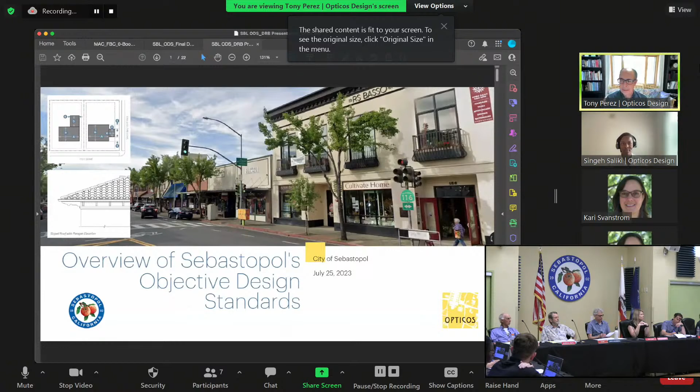Thank you, Tony. Can you guys hear me okay? Yes. Okay, let me go to my presentation and share my screen. Singeh, if it would help, I have the slides and can share my screen. Yes, please do. Okay. Is that coming across? Yes. Okay, thank you. You're welcome. Okay, hello everyone.

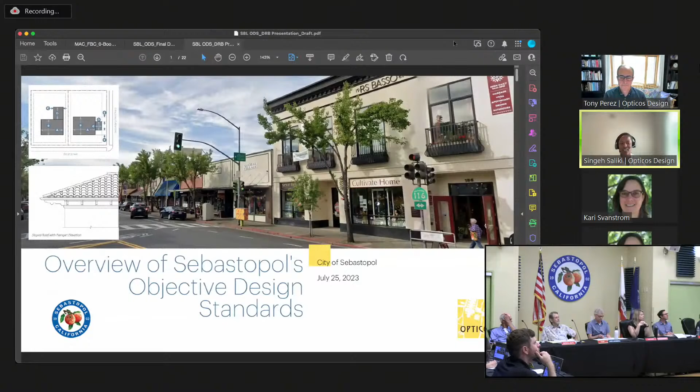As Tony said, today I'll be presenting an overview of Sebastopol's objective design standards. Next slide. The topics I'm going to cover are: what are objective design standards, where the standards apply, how we prepared the standards, and an overview of the specific topics covered by the standards.

Next slide. The California Government Code defines objective standards as standards that involve no personal or subjective judgment from a public official. The reason the state is requiring objective standards is to support more streamlined review and approval of housing projects. Next slide.

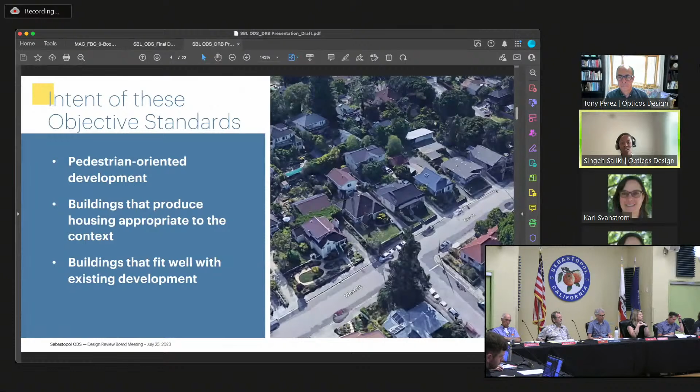The intent of these standards is to really look at the form of development in Sebastopol, to understand how these standards could reflect development oriented to pedestrians in both form and scale. The standards focus on producing housing types appropriate to the different contexts in the city. For example, housing types appropriate for downtown might not be the same as those appropriate for Healdsburg Avenue or South Main Street. The standards also try to produce buildings that fit in with existing development, reflected in the form, character, and scale of what will be produced by the standards themselves.

Next slide. The standards will apply citywide to all commercial and residential parcels that currently allow 2 or more units. This includes areas where duplexes are allowed, as well as multifamily zone districts and mixed-use zone districts where residential is an allowed use.

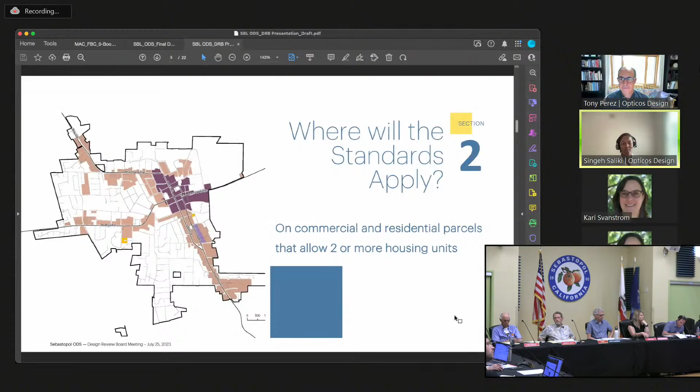Next slide. Our approach to developing this is form-based, where we use the existing and intended physical character as the inputs to develop the actual standards found in the final document.

First, we looked at the existing character in the neighborhoods throughout the city and identified prevalent patterns that we found. We also looked at the existing development standards and what they actually produce, to understand the intended physical character.

Specifically, we looked at the zoning envelope allowed for each of the zones where the ODS would apply, so that's R5 through R7 and the CO, CG, and CD zones. We compared the prevalent patterns to the intended physical character to see if they are in alignment, and also to help inform the new ODS standards.

Our research was summarized in an existing conditions memo that we produced earlier on in the project.

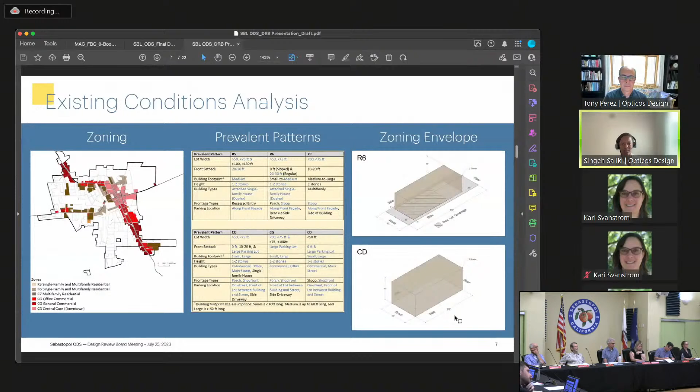One key concept we focus on is differentiating between house scale and block scale. The downtown area is a block scale environment characterized by buildings with zero front and side yard setbacks, and the buildings really help to define the street. This is in contrast to the adjacent neighborhoods, which are more of a house scale environment with increased front and side yard setbacks. The reason this is important is because we want to ensure the ODS fits across a spectrum of environments that will allow both house scale and block scale projects to occur.

I just want to say to everyone that if you notice, this is downtown Healdsburg, and we're not talking about downtown Healdsburg in any of these standards. But we found that in presenting this concept of house scale and block scale buildings, this little snapshot of downtown Healdsburg is a really clean, simple way to explain it. We're happy to make a diagram like this for Sebastopol.

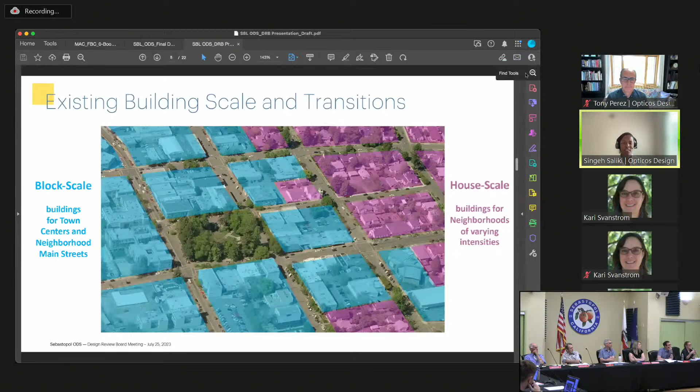Our analysis resulted in the ODS being organized into a palette of 4 districts, intended to produce a spectrum of intensity from lower intensity house scale neighborhood environments, shown towards the left side of the slide, up to higher intensity block scale environments, shown towards the right side of the slide. You can see some of the key metrics for the 4 different districts, the number of stories allowed and the overall height allowed in each of these districts.

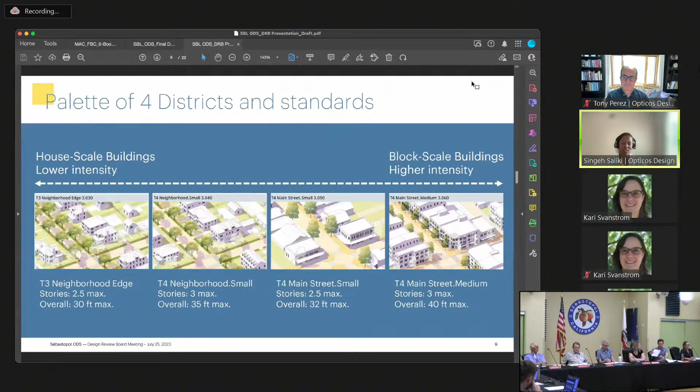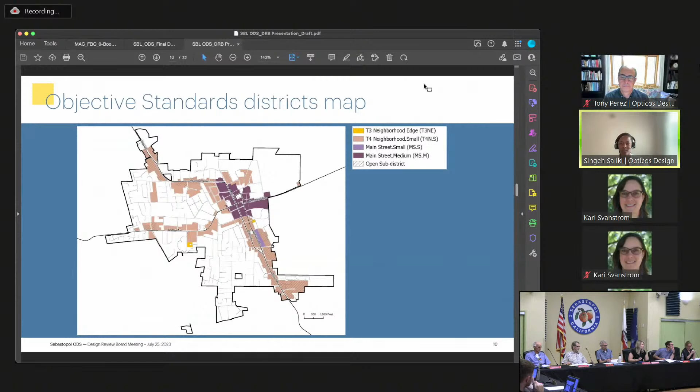Now I'm just going to give an overview of the specific standards that will be in what is called Article 2, which will be a new standalone document adopted by resolution. The document is organized into 11 chapters, and I'm going to go through and describe some of the key features, as well as dive in more into specific chapters to provide more detail.

Starting with the preamble, it describes the context and the Sebastopol transect and identifies the form-based districts that implement the Sebastopol transect. Chapter 1 is just an introduction that specifies the basis and intent for the ODS. Chapter 2 establishes the palette of the 4 districts included in the ODS. Chapter 3 provides specific standards that apply to each of the districts. Chapter 4 provides standards that guide the design of sites.

Chapter 5 goes into detailed standards to shape the zoning envelope through the use of specific building types. Chapter 6 is for standards for frontages, which is the transition area between the back of the sidewalk and the building facade. Chapter 7 is for architectural design standards and is style neutral. Chapter 8 provides standards for signage, and chapter 9 standards for large sites, which apply in situations where you have a very large parcel -- the threshold in this ODS is a parcel that's at least 3 acres, where there's an expectation to subdivide it into new streets and blocks.

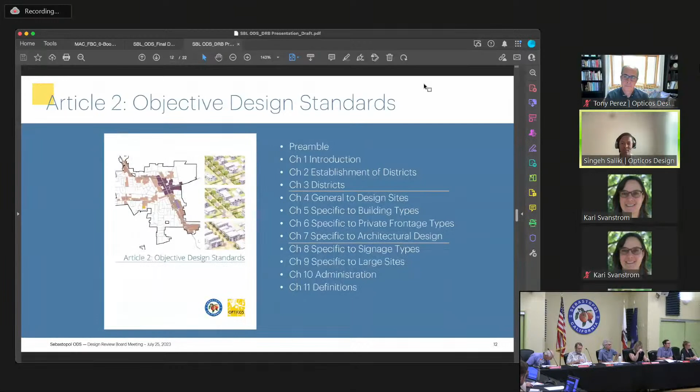I'm going to go into detail now about the specific contents of different chapters, starting with chapter 3. As I previously mentioned, chapter 3 contains guidance for the basic zoning envelope for each of the four districts in the ODS. It's organized in four pages and includes the intent of the district and the basic dimensional standards that help create the zoning envelope. The standards are presented in tables, and they are keyed to the diagrams above the table.

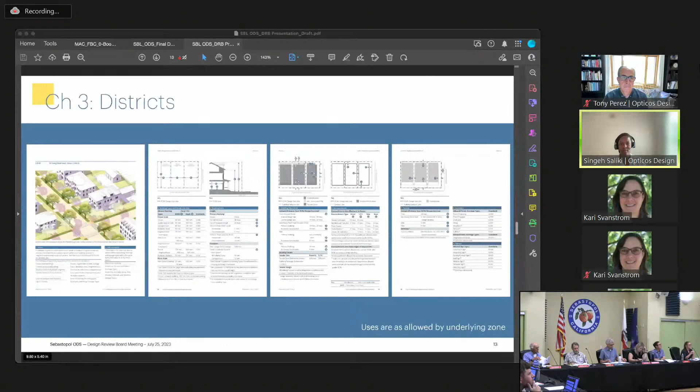Chapter 5 goes into standards for specific building types, which is really a way to think about the outcome of the zoning envelope. It ensures that the ODS produces buildings which are compatible in form and scale with the surrounding context. The building types are organized by zone, by district, and range from house scale types, like duplexes and triplexes, to block scale building types such as Main Street buildings and larger courtyard buildings. The standards regulate the building footprint and also provide guidance for how the footprint can be expanded using wings.

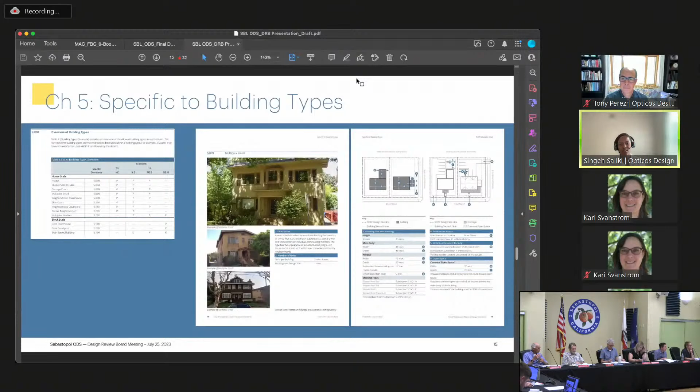Chapter 6 addresses frontages and provides specific guidance for this area, which is a transition between the back of the sidewalk and the building facade. The standards are organized in a spectrum to ensure a consistent public realm, because this impacts the pedestrian experience as you move along it. The frontage types are organized by districts and range from more residential frontage types, allowed in less intense residential districts T3 and T4 neighborhoods, to more commercial frontages like storefronts, allowed in more intense mixed use and commercial environments.

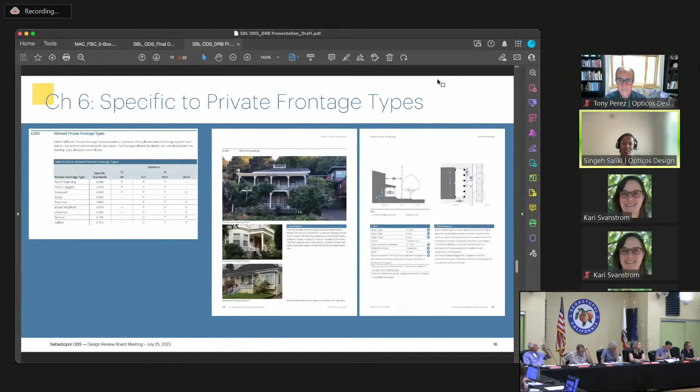The architectural standards in Chapter 7 are style neutral and address architectural variety, building volume, facade composition, and materials, really looking at the basic elements one should consider when assembling a building.

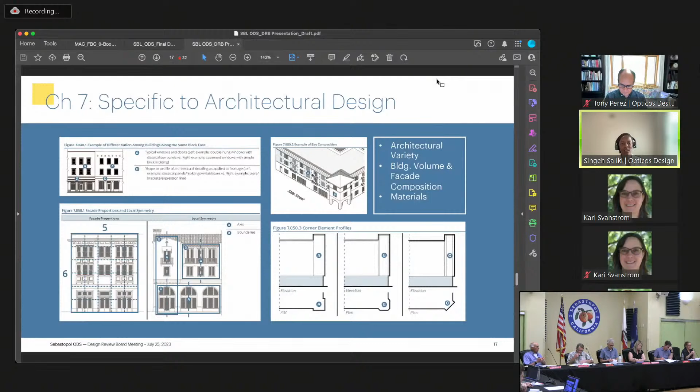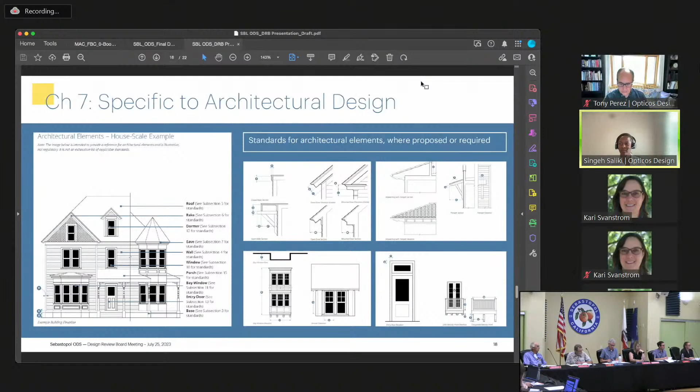The next chapter addresses signage types and is again organized by districts. Generally, the signage types in the ODS are only allowed in the open sub-district, which is along the major corridors, or in more intense Main Street environments like downtown and portions of Petaluma and South Main Street.

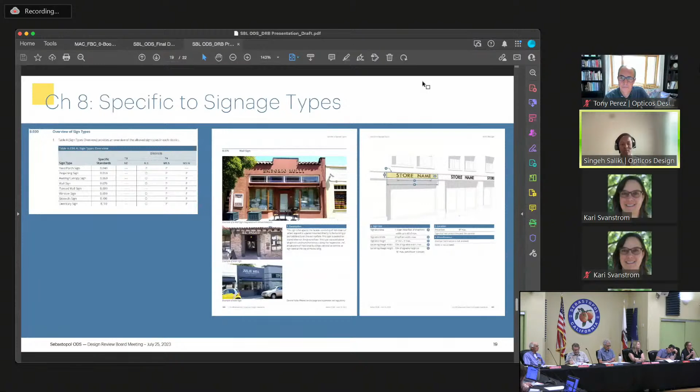Chapter 9 regulates large sites and provides guidance for the process of subdividing larger parcels that are at least 3 acres. It includes guidance for the layout of streets and blocks to ensure connectivity with surrounding areas, and also guidance for public access to these larger parcels through the use of specific open space types. The standards for the open space types help shape the form and character for each of the open space types.

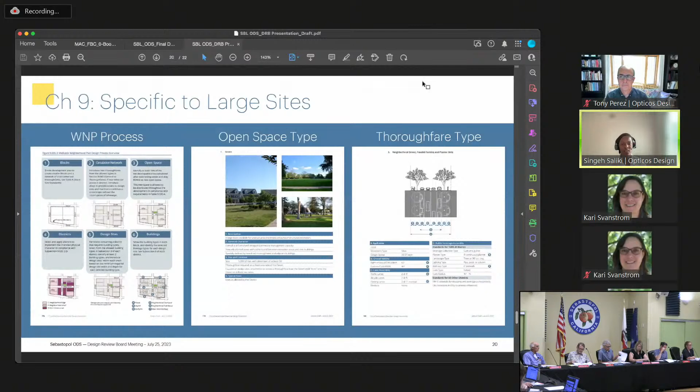Chapter 10 provides guidance for the administrative process and review of ODS projects, and includes provisions for adjustments. Adjustments are a tool to help support streamlined review of projects where there might be a condition unique to the project where administrative relief is desired. This chapter describes situations where adjustments might be acceptable, and provides guidance to the planner reviewing a project under ODS on how to measure and understand how adjustments can occur, so that it allows for a deviation from the dimensional standard that can be processed administratively as part of the application.

The last chapter contains definitions that supplement those in Title 17. It also includes a section on measurement methods, which helps explain how to calculate certain standards, for example, the percentage of sloped area on a parcel that can be developed.

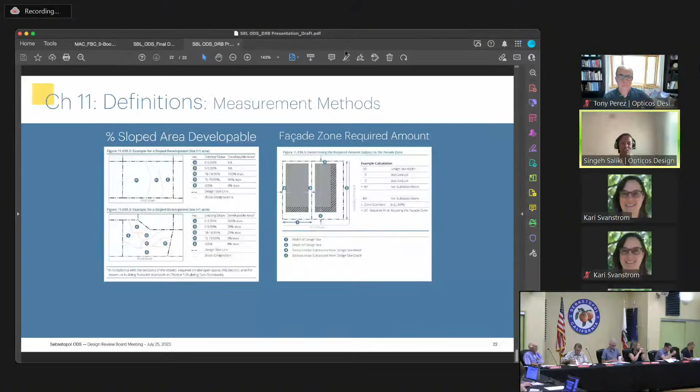Or the amount of a building facade where the frontage is required to be located. This concludes my overview of the ODS, and with that, I'll hand it back to Tony if he has anything else to add.

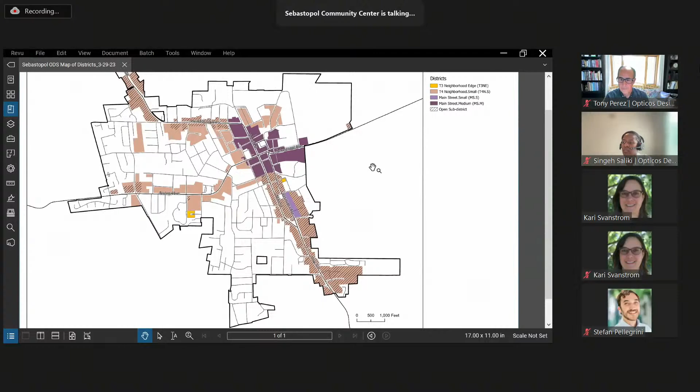As you're going through it, I'll translate it to the zoning a little bit since most of us are familiar with the zoning districts. So the T3 neighborhood edge, that is the R5 zone. You can see the R5 allows single family and duplex. That's the yellow. We don't have very much property zoned that way.

You can see, I believe this is Stefanani Court, and over on Eleanor Avenue there are a few. That's about it in town. However, that's kind of poised so that in the future, if we rezone additional properties R5, this would be applicable to those. When we introduced the R5 zoning in 2018 - I say we, this is before my time, but my understanding is the map got adopted about 2 months after I started working here.

The intent of the R5, what's mapped right now, is locations that do have duplexes. Stefanani Court, I believe, is a development where the end of the court has duplexes - that's the one on the cul-de-sac on the west side. South on Robinson Road is the back portion of that. The intent is to create a transition between single family and denser development, multifamily and whatnot.

In 2017, 2018, when the Planning Commission was reviewing the zoning map changes, there were additional parcels identified - some down on Hayden, some on Calder, I think around the Art Center.

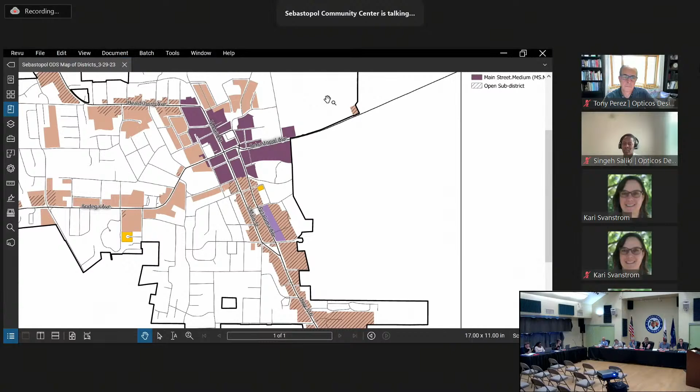Okay, thanks for that. Any questions on that map for our staff? Since the map is missing from the final guidelines, can these guidelines be amended to include the map? Absolutely, yes.

All right, well, I guess we can take some time to discuss this as a board. Anybody want to jump in first?

Carrie Bush? Sure, boy would I. I've been looking forward to this for a long time. It's great. I wanted to start with a big thank you to everyone for their hard work, especially the subcommittee who put a lot of time and effort into putting a document like this together. I know it probably took a lot of your extra brain power and time.

I'd like to ask the subcommittee to report out a little bit about their challenges. I was wondering about the examples, possible key points that summarize the final ODS draft. Were there perhaps certain subjective notions that were then made objective? Were there any key points you care to touch on?